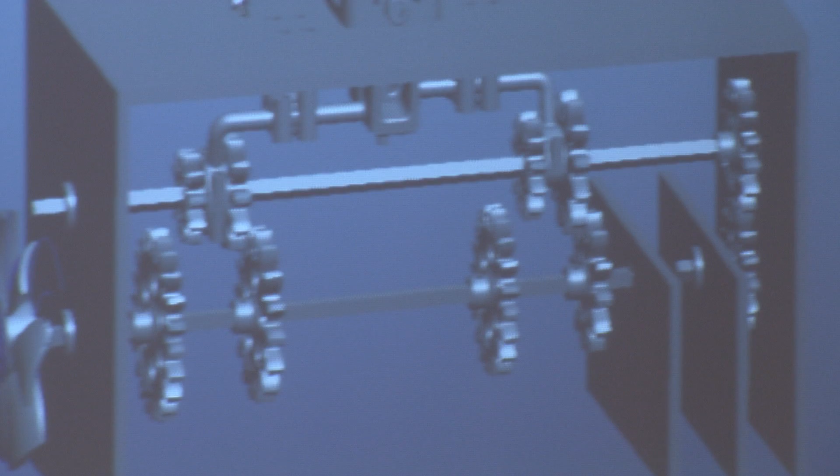So whenever we were trying to come up with an idea, we thought, what better thing to do in mechanical engineering than a manual transmission? And so we looked at several different styles, and this style in particular is modeled similar to one for a lathe. Hold on.

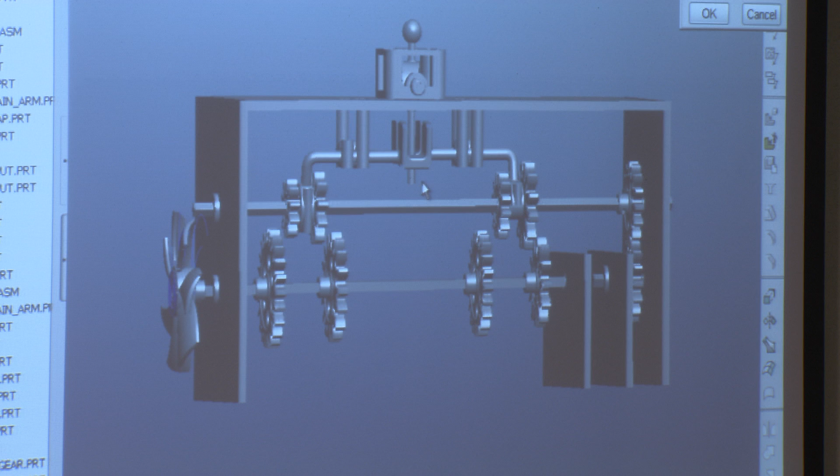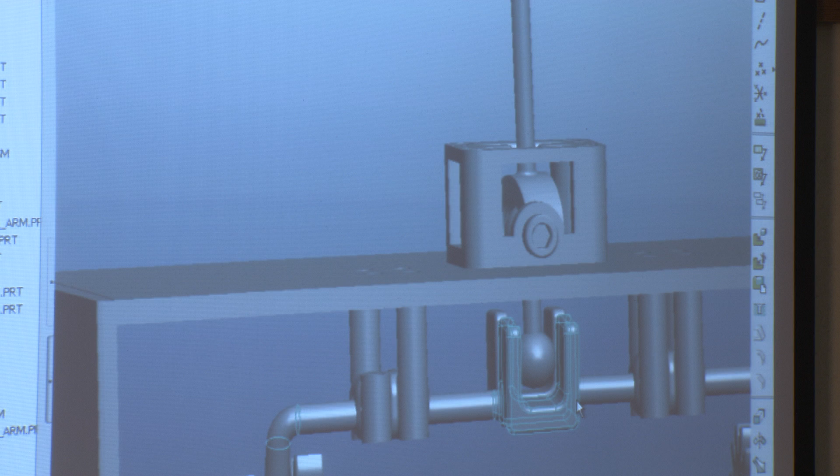So we ran into some problems with our assembly because our shifter mechanism actually sits on a ball here that has the screw that goes through, and so we weren't able to set the limitations on the rotation around the vertical axis here. And then same with this ball that fits inside the shift forks. It actually transfers from surface to surface and then is able to move back and forth.

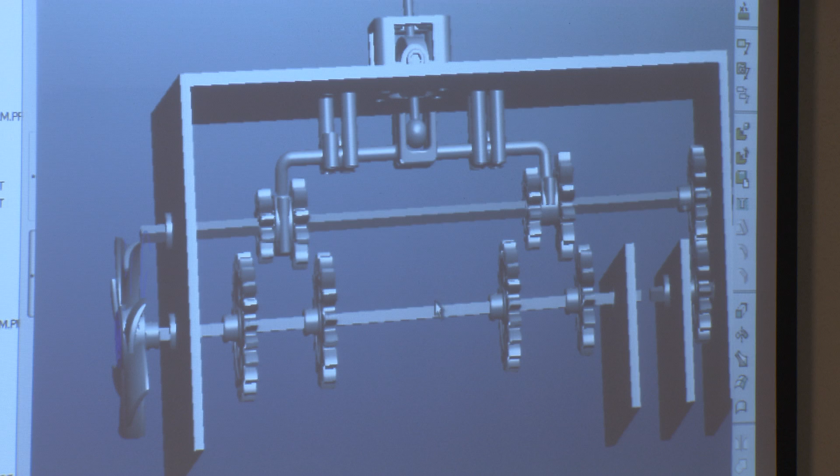So we weren't able to make an assembly that works, that you could actually show for shifting gears. But we have the input, and then we have an output, which is our fan that shows how it works. And I designed the shift box, so I'll talk about that.

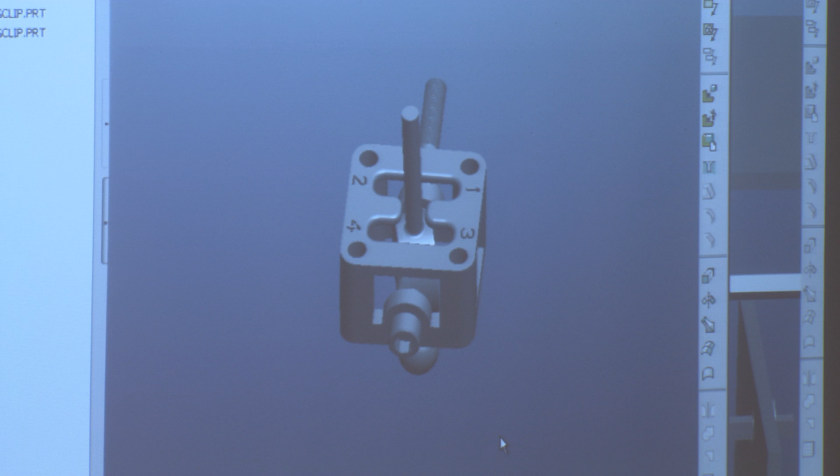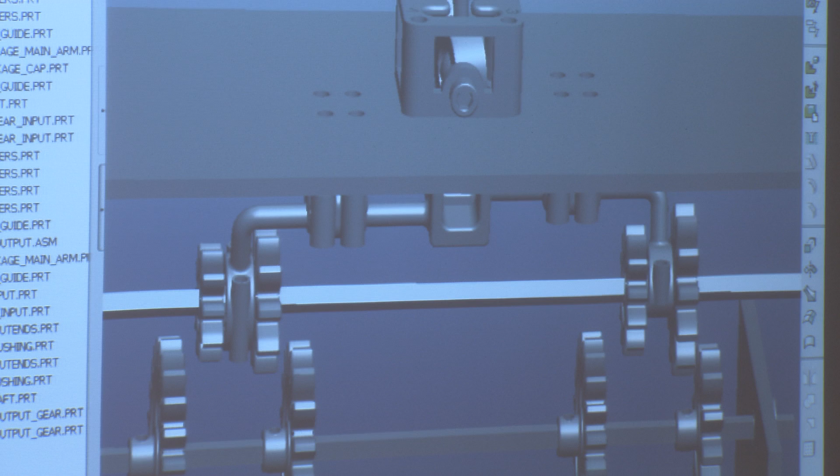So for the shift box, we engraved the gear number on the top, and then made the H pattern here, which is what the shifter will follow in order to shift between each gear. And then it has this ball at the bottom which fits in the shift forks that you saw in the assembly. And then we just left it open at the top so that we could mount some type of a ball, or in our final model's case we mounted a cork. And I'll let Graham talk about the fan output that he designed.

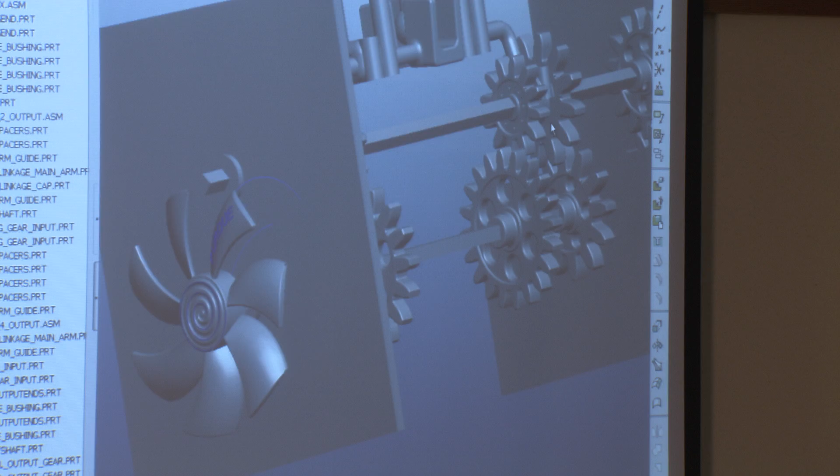Okay, so for sort of an erector set type toy, we quickly learned that we had limitations on volume. If you look at our gears, there's holes everywhere. We've trimmed anything we possibly can. And the fan in particular is our most complex part. Because we designed it from the ground up parametrically, we were able to modify it quite easily to trim the volume down. We cut the volume down in half, actually.

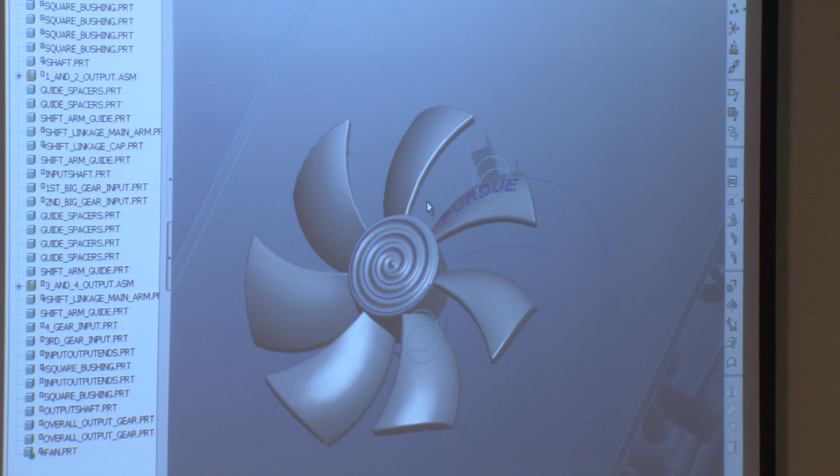One of the things we did was the actual diameter of the fan blades is about an inch larger. We played around with the number of fan blades, which is a simple pattern. The fan blades themselves are a variable section sweep, with some nice rounds on them. We even played with the idea of engraving Purdue on the fan blade.

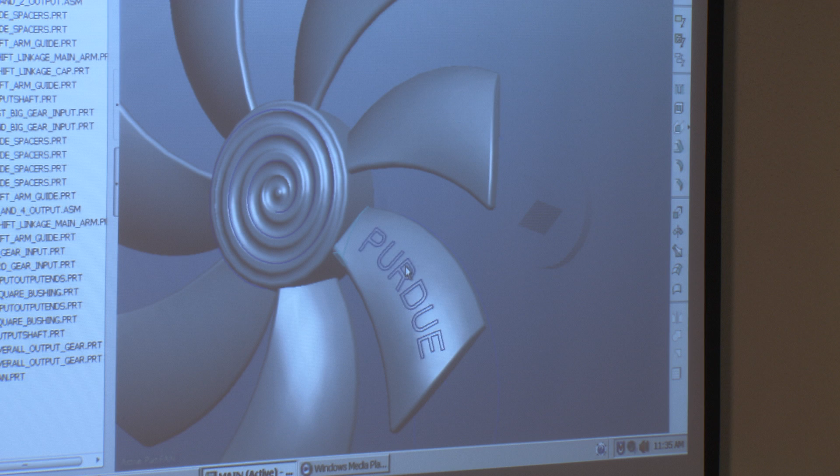We ended up not doing that, but we did put our initials around here on the back. What we didn't realize was how visible they'd be through the SLA, and we should have mirrored them so that they'd be legible from the front, because right now they're actually legible from the back. It was sort of just an Easter egg.

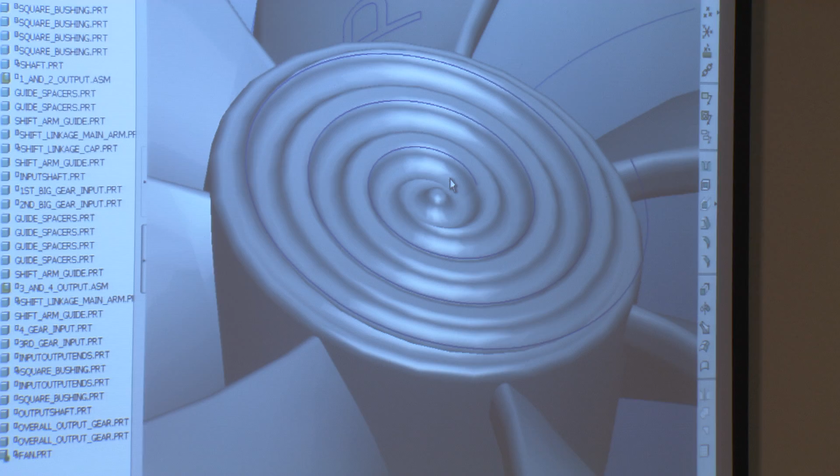Also, a really cool thing that I'd never done in PTC before was actually switch into polar coordinates to make this spiral pattern, which is a series of sweeps, sweep cuts. I actually used equations in polar coordinates to make those spirals, which constrained the sweeps.

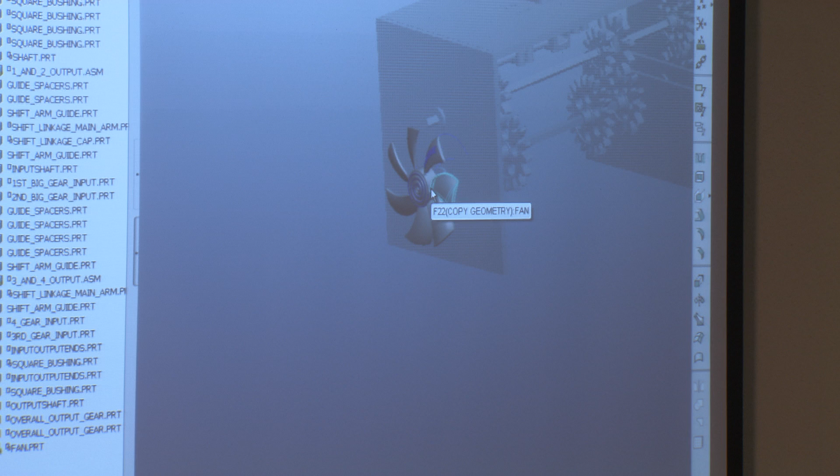So all in all, we were also surprised how thin we could make the material but still retain rigidity, which was excellent, since our model needs rigidity to function. We can't have gears that just flop.

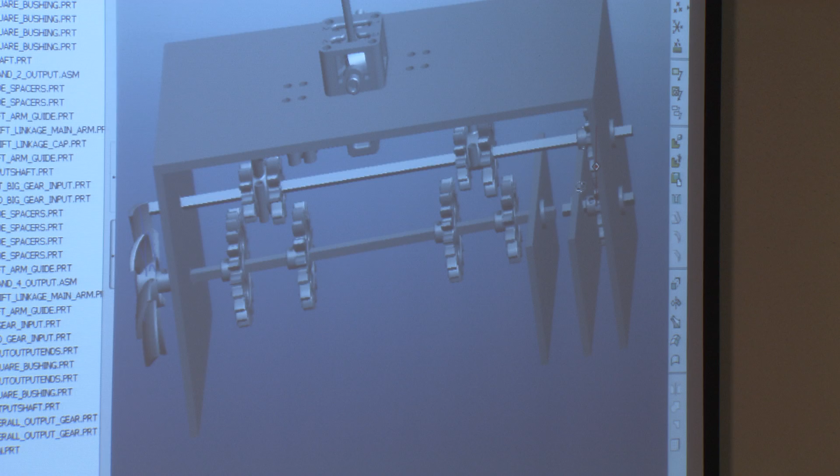Yeah, that was one of our main concerns. Since with this style of transmission we don't have anything that actually transitions for engaging the gears, whenever you're shifting, you're pretty much just grinding the gears together until they engage. So you're putting a lot of load on the gears, and we wanted to make sure that we were going to have good tooth thickness and gear width so that they wouldn't bend or break.

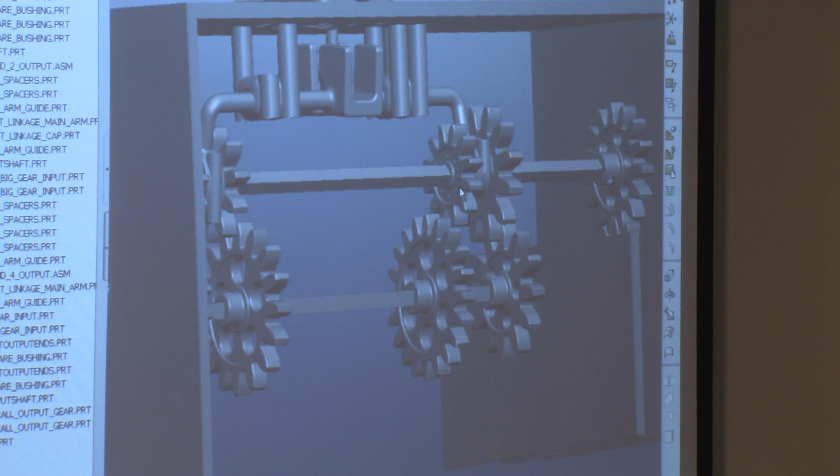It's also why our actual number of gear teeth is so small. And there are no dog teeth. Even these little itty bitty gears have tiny little holes in them to reduce volume and to help drain the fluid.

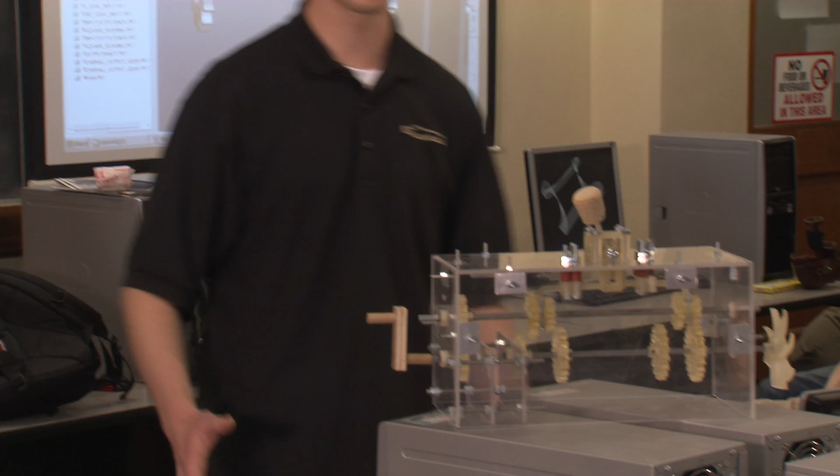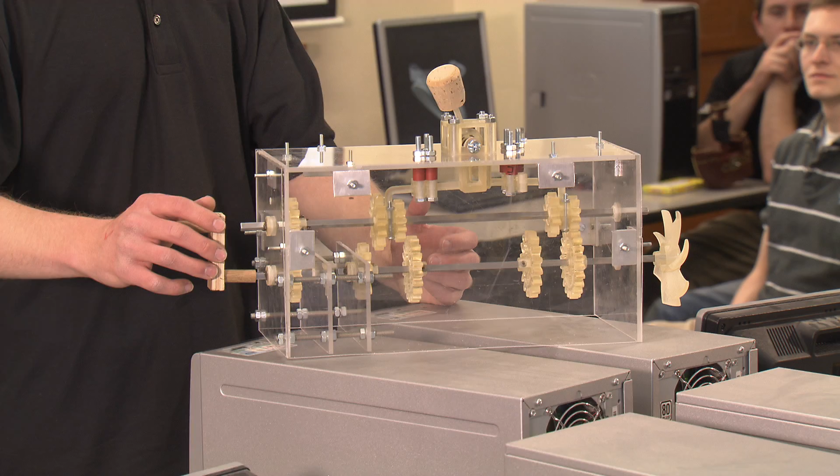Garrett, you want to talk about that? Sure. So one of the most difficult parts of this project was getting everything to fit together and actually work together. You might have seen me kind of futzing with it a little bit just before this presentation, trying to get in first. Turns out first and second gear are kind of difficult to shift into, but once you're in there, it actually works pretty well, and you can sit here and spin the crank, and it's actually kind of cool because you can see two gear sets.

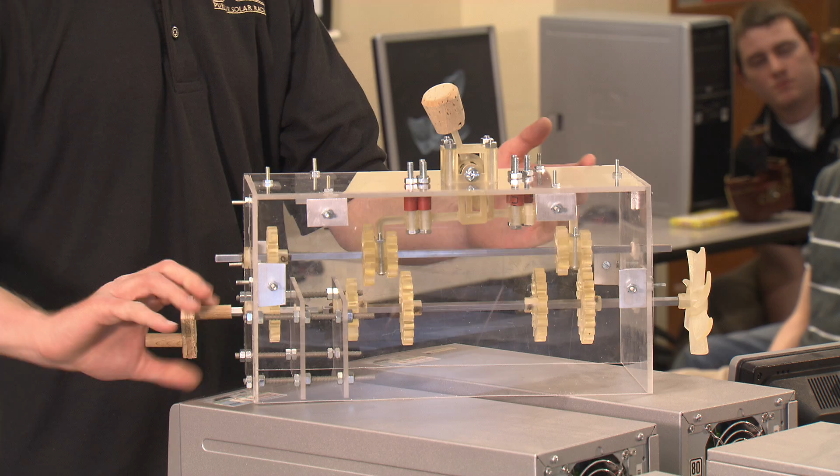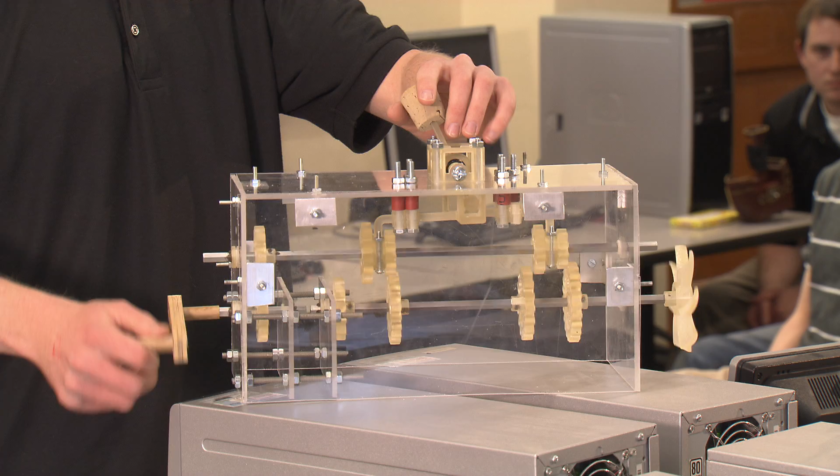Right now I'm in first gear, and you turn the crank a whole bunch of times, and the fan barely moves. So you go ahead and, there we go. Second gear, hit that, and oh, check it out. Fan's spinning a little faster. Come on over, and it actually shifts much more smoothly than we thought it would. It goes into third and fourth, no problem. And you can see that's a 1-to-1 gear ratio. Come out, going fourth, and then you have overdrive.

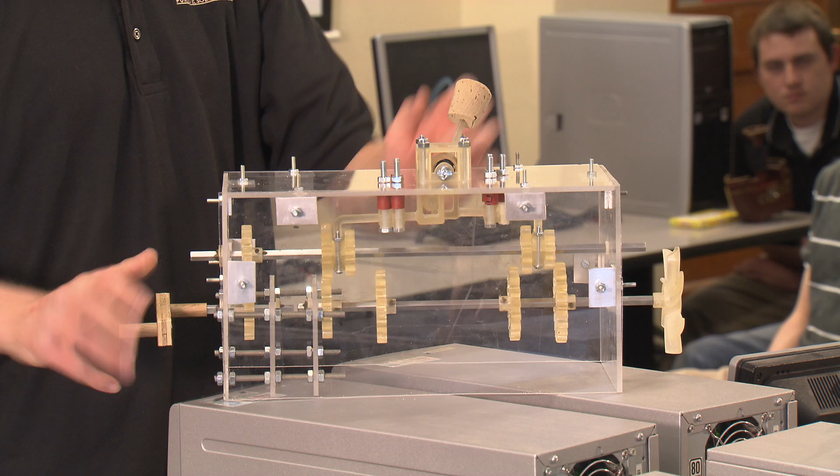So that's pretty cool. But one of the most difficult things was just getting everything to line up. And even now, like I said, first and second gear are just difficult to move. But we also had a lot of binding with our shifting mechanism. We've got these two shift levers that kind of wrap around a pair of gears for first and second, third and fourth, a cluster. And we had a lot of problems getting those to fit and actually move freely. They'd fit. You could clamp them together, you could bolt them together, and you could spin them with your hand if you really kind of tried and finessed it.

I mean, you don't want to break anything, because it's one of those things where if you break it, you're done. But we talked to someone who's actually pretty familiar with the SLA material, and we did a little research online, and we found out that you could use a silicone lubricant. It actually works pretty darn well. We actually have great lubrication right at these two clusters, and that's really where we needed it most. The SLA material interfacing with the acrylic, there isn't too much friction there. That's pretty easy to move.

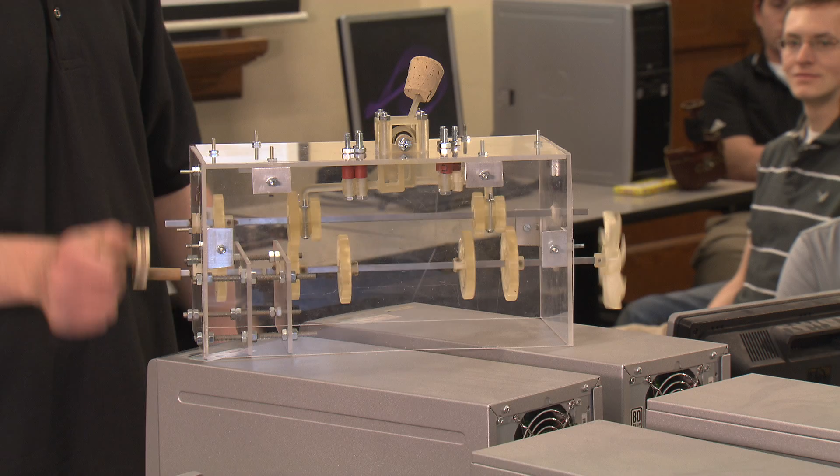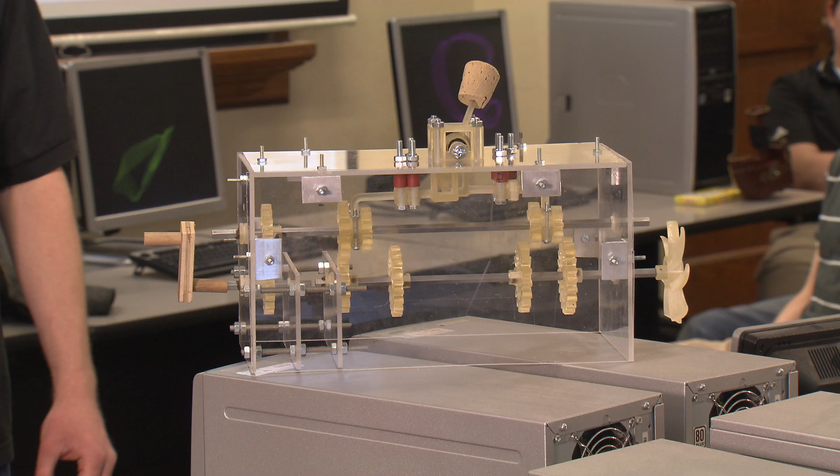But overall, I know at least I'm personally pretty happy with it. I'm actually kind of surprised it works as well as it does. Talk about tolerancing a little bit. But yeah, tolerancing was one of the most difficult issues that we had when putting this together. We bought some 1/4-inch square shaft. We didn't want to buy spline shaft because we figured we'd have itty-bitty little splines, and the first thing to fail would be those little teeth on the splines as opposed to the gear teeth themselves. So we bought essentially a 4-spline shaft. It's just a square shaft, and it works out pretty darn well.

But it's actually a little bit less than 0.25. It's about 0.247, and we actually designed all of our square holes to be 0.25. So we've got 3 thousandths, plus or minus 1.5, and even then, every single square hole was undersized. And the most difficult thing about that was getting a really tiny file in that square hole and keeping that hole square, or square enough.

But that worked, and we had issues with our shifter mechanism. You've got a cylinder going through a round hole, but some of them were printed horizontal and some vertical. So when you bring them together, you'd have a whole bunch of little ridges going against a whole bunch of little perpendicular ridges, and that created a lot of friction, and you had some non-circularity. But careful sanding fixed that.